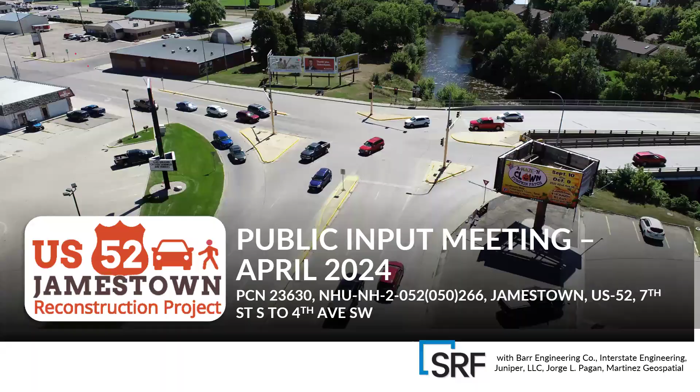During this presentation, I will discuss the project purpose and need, project location, project schedule, project background and feedback collected to date, traffic analysis and proposed alternatives, other project considerations, and preliminary cost estimate and next steps. The goal of the public input meeting is to solicit feedback from the public and answer any questions about the project. This is an important part of the design process and project success.

You can provide comments on the proposed improvements by Friday, May 3rd, by mail or email to the contact information that will be provided at the end of the presentation. All comments that will be submitted will be included in the environmental document.

The US 52 project limits start at 4th Avenue Southwest at the bottom of Mill Hill, crosses the James River, and goes through US 52 and 10th Street Southeast intersection to the north to 7th Street Southeast. US 52 will be a concrete reconstruction from 4th Avenue Southwest to the US 52 and 10th Street Southeast intersection, including replacement of the existing bridges over the James River.

Reconstruction will conclude where the proposed intersection improvements tie into US 52, 10th Street Southeast, and 1st Avenue South to the north and east. Pavement markings will be replaced on 1st Avenue South/US 52 between the intersection reconstruction and 7th Street Southeast to ensure connectivity to the 3-lane roadway section that runs to the north along US 52. Improvements to the pedestrian facilities and the addition of pedestrian crossings will also be included, along with the replacement of storm sewer, lighting, and signage.

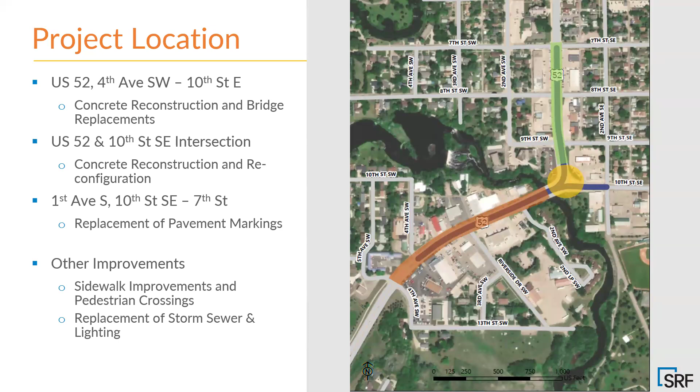The main objectives, purpose, and need of the project is to replace the deteriorating roadway pavement and bridges, maintain vehicular mobility and access to local streets and businesses, improve the pedestrian environment, facilities, and local connections, and improve this important connection to the surrounding transportation corridors, supporting local and regional mobility.

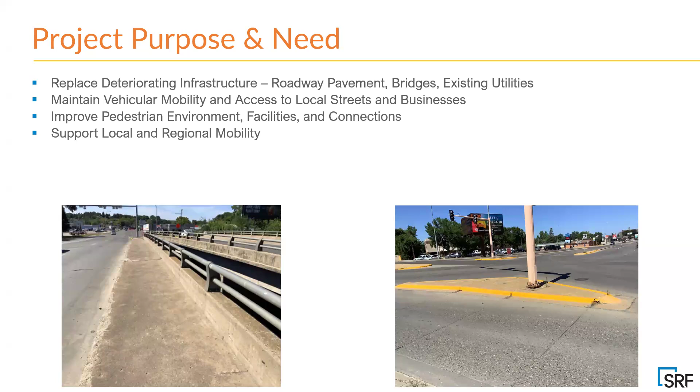The project schedule has several key milestones that need to be met before the project can be constructed. Several milestones and work have been completed up to this point. One of the first milestones is the field review, which is the first look at existing conditions in the project area. This was completed in January of 2023. An initial public input meeting was held in August of 2023, where local businesses and users of the corridor were invited to share their feedback on how they use the corridor and what improvements they would like to see.

Following that meeting, the project team analyzed existing and future traffic conditions and developed roadway alternatives and intersection options that satisfy the purpose and need of the project. Those design concepts are ready for public input, which brings us to where we are today with public input meeting number 2. This presentation and comment period allows the public to ask questions and provide feedback on the project alternatives.

Next is the environmental documentation process, which looks at environmental impacts for the proposed alternatives. During this phase, project decisions are made by agencies to move forward with final design and construction. The tentative completion dates include final design plans in May of 2026, with tentative construction in 2027. These dates depend on several factors and are subject to change.

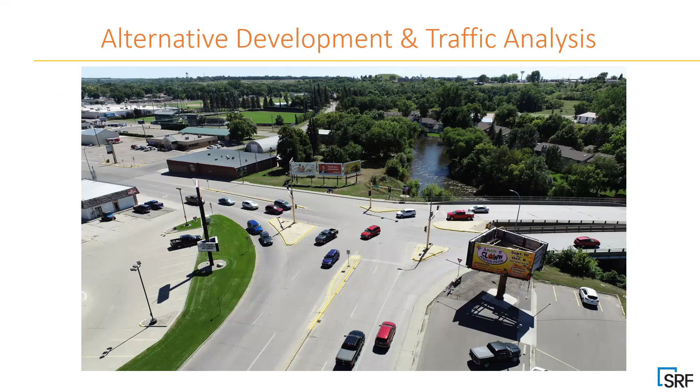Throughout the preliminary design process, we heard from stakeholders and the public that safer pedestrian crossings are a priority. The crossings are essential to provide connectivity and safe opportunities to access the adjacent park, residential areas, and local businesses. All the alternatives have 2 pedestrian crossings on US 52 between Mill Hill and the James River, which will be discussed in more detail in a few slides. In addition, all of the intersection options for US 52 and 10th Street Southeast will have crosswalks.

In addition to pedestrian needs, a component of this project was to look at existing roadway average daily traffic volumes, also known as ADTs, compare them to future needs, and determine the appropriate future roadway capacity. As you can see on this slide, the 2022 volumes range from around 13,000 to 21,000 vehicles per day. These volumes were increased by 1.1% annually to develop the year 2045 volumes, which aligns with the projected population and employment growth following a similar pattern.

The future ADT of 25,700 vehicles tells us that US 52 west of the river must continue to be a 4-lane roadway. One of the goals of the study is for First Avenue South to tie into the 3-lane design that is north of 10th Street Southeast intersection. This 3-lane transition to the north will happen through revised pavement markings and signing. The traffic analysis led to the development of intersection options and US 52 corridor alternatives.

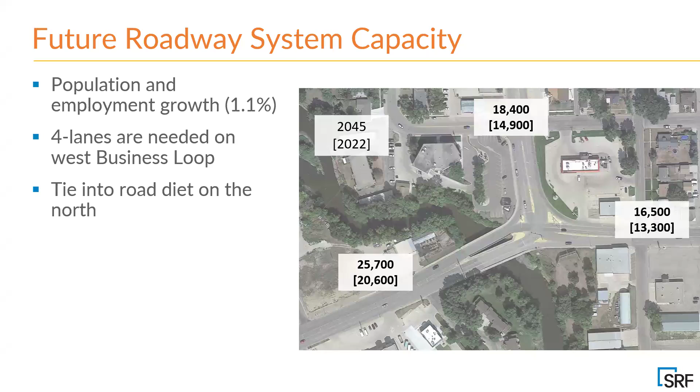When developing the design options and alternatives, the team focused on making sure we provided the desired improvements to satisfy the purpose and need of the project. This includes ADA compliant and improved pedestrian environment with the addition of 2 pedestrian crossings west of the James River, full intersection access at 4th Avenue Southwest, reduced driveway access and conflict points to improve safety, replacement of storm sewer and lighting, separation of the sidewalk from the roadway and parking lots, and replacement of the striping between 10th Street Southeast and US 52 intersection and 7th Street Southeast to connect to the existing 3-lane roadway to the north.

Certain design elements were also desired to be similar across the alternatives and options, including maintaining the 25-mile-per-hour speed limit, 12-foot lane widths for all through and turn lanes, greater than 5-foot sidewalks wherever possible, and boulevards to provide buffers between the roadway and pedestrians.

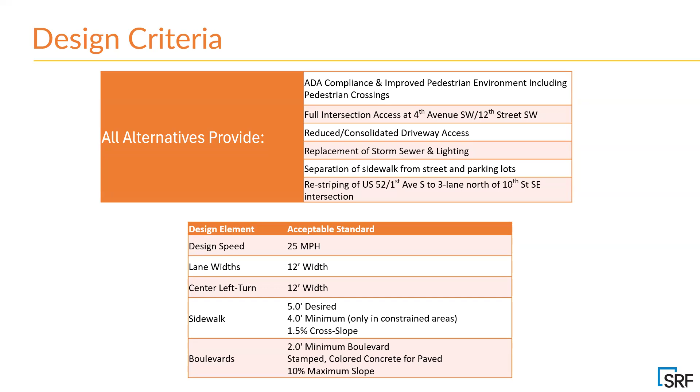As mentioned, 2 pedestrian crossings are anticipated to be incorporated west of the James River. These are a part of all project alternatives. The first one is on the west end of the project at 4th Avenue Southwest and 12th Street Southwest. This can be located on either the west or east side of the intersection. The second location is between Riverside Drive and 2nd Avenue Southwest. The concept currently shows this closer to 2nd Avenue Southwest, but can be moved further west.

Both locations should include pedestrian crossing signs on both sides of US 52 and in the median, and would be equipped with flashing beacons to ensure traffic is alerted to crossing pedestrians when present. Both locations will be finalized during final design as a result of feedback and coordination with stakeholders.

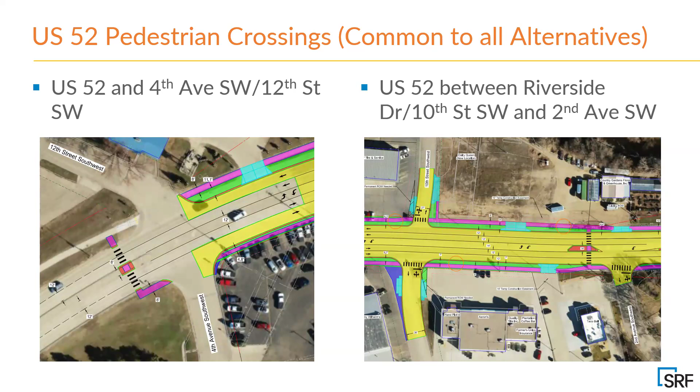Moving forward out of the analysis are 4 options at the US 52 and 10th Street Southeast intersection and 5 corridor alternatives for US 52 west of the James River. The 4 intersection options we will look at and ask for feedback on are option 1, radial T; option 2, double crossovers; option 3, displaced left turns; and option 4, a roundabout.

Corridor alternatives that are being evaluated are alternative A, no build, an alternative that is required to be included for all projects but does not address the needs of the corridor. Build alternatives include alternative B, 5-lane with 2-way left turn lane; alternative C, 4-lane full intersection access with raised medians; alternative D, 4-lane, 3/4 intersection access with raised medians; and alternative E, 4-lane, right-in, right-out intersection access with raised medians.

Starting with the US 52 and 10th Street Southeast intersection, option 1 is the most conventional of all of the options, with a 3-legged radial T configuration. The north and east legs both have 2 lanes to go west on US 52, with all other movements having 1 lane. This intersection has 1 traffic signal with pedestrian crossings and refuges on all 3 legs that are protected by the signal.

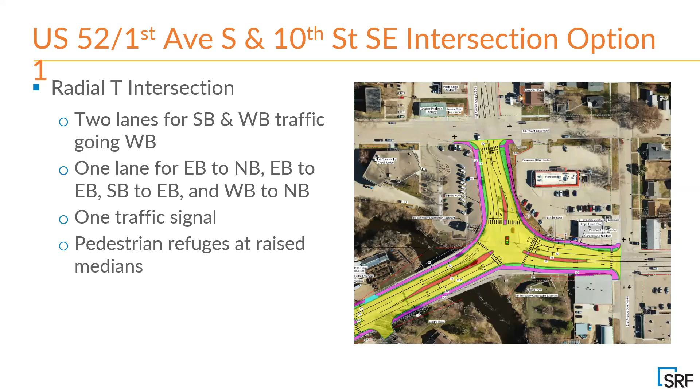Option 2 is the double crossover configuration. There are 3 signals, with the outer 2 located near 2nd Avenue Southwest and 2nd Avenue Southeast. At those outer signals, traffic wanting to make a left-hand turn at the intersection must cross over. Traffic making that movement from US 52 to stay on US 52 North, 1st Avenue South, would then make a left turn movement at the middle signal. Traffic from 10th Street Southeast going west on US 52 would do a second crossover movement at the west signal.

All right turn movements go straight through the outer signal locations. All 3 signalized intersections have pedestrian crossings and refuges and can be protected by the signal. 2nd Avenue Southeast becomes a right-in, right-out intersection for side street users with this option. The additional raised medians can be used for landscaping or aesthetics.

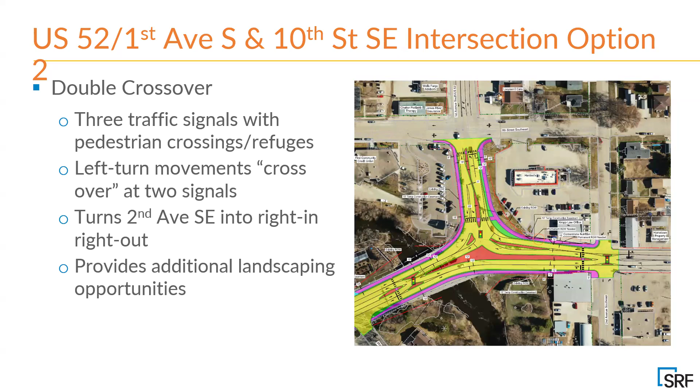Similar to option 2, option 3, or the displaced left turns option, contains the same double crossover at 2nd Avenue Southeast, with the same movements and reduction in access for side street users, but does not include a 3rd signal near 2nd Avenue Southwest. In this option, the westbound left turn movements from 10th Street Southeast are able to make their movements at the same time as the southbound left turn movements going east on 10th Street Southeast.

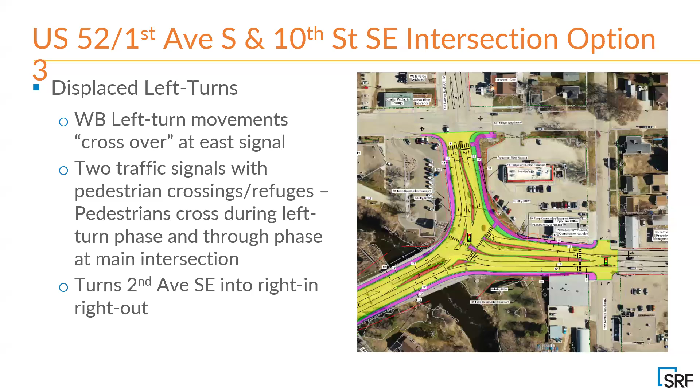This allows pedestrians to cross US 52 lanes into the center median at the main signal. When the US 52 movements that continue on US 52 North, 1st Avenue South, have the green movement, pedestrians are then able to move freely north and south on the east leg of the intersection.

Option 4, the last intersection option, is the roundabout. The roundabout would have 2 lanes entering and exiting on all 3 legs, with pedestrian crossings, refuges, and pedestrian crossing signs and flashing beacons to alert traffic. Right turn movements are able to move freely in the roundabout with dedicated lanes for those movements. The roundabout also allows the ability for users to make U-turn movements from all directions by entering the left-hand lane.

Depending on the finalized roundabout configuration, it is likely that acquisition of property in the northeast corner of the intersection will be required. Minimal to no impacts to parking will occur to the current businesses on this property.

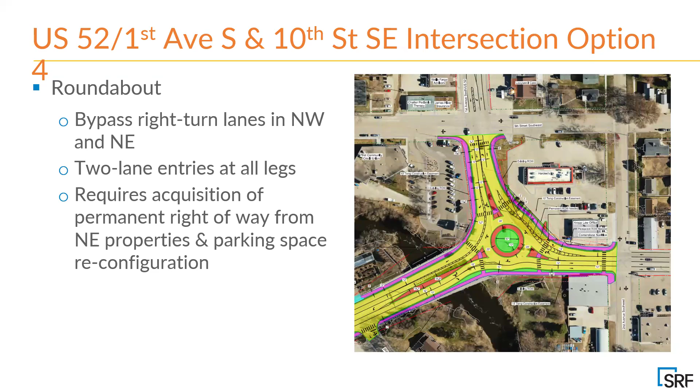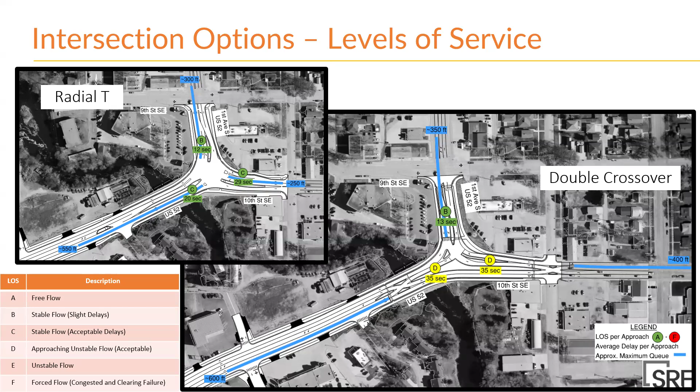Like previously mentioned, 4 intersection options are under consideration at the main intersection of 1st Avenue South and 10th Street Southeast. All of these designs offer acceptable levels of service, or the amount of delay and distance that vehicles queue up. The level of service for the radial T is either a B or C, depending on the approach leg. The double crossover option has longer delay and queues than the radial T, with up to level of service D on the west and east legs of the intersection.

The displaced left option also has levels of service B and C, but has the longest queues, especially on the southwest side of the intersection. The roundabout has the best operating levels of service. The queue lengths of the roundabout are also the shortest of all of the options evaluated, except for the east approach, which is only 50 feet longer than the others.

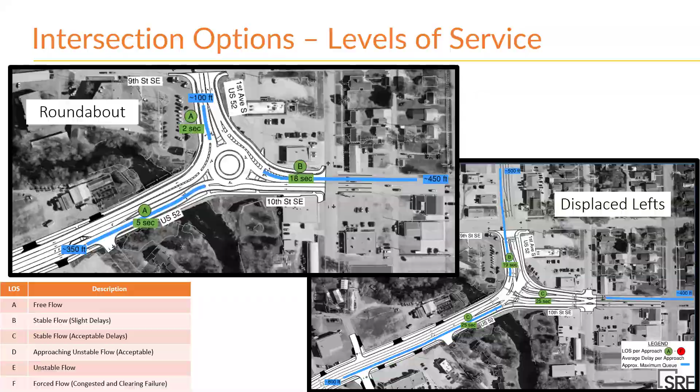Moving to the west side of the James River on US 52, we will start with alternative B, which is very similar to the existing configuration, with 5 lanes, which includes 2 lanes for each direction and a center 2-way left turn lane. This option maintains access to all movements to and from side streets, as well as most of the movements to and from private driveways. A safety improvement being proposed with this alternative is realigning the Riverside Drive approach with the 10th Street Southwest approach to eliminate the existing skew.

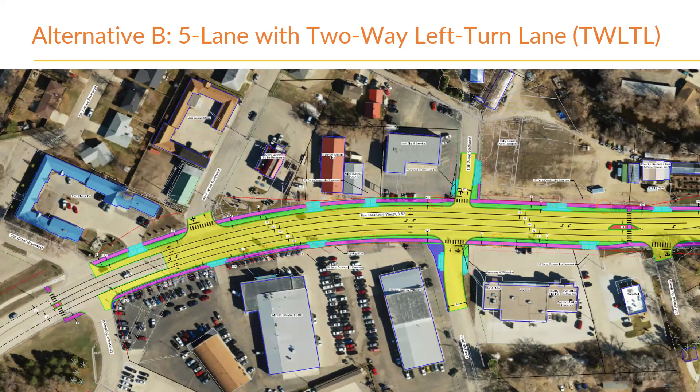On this slide, you can see a rendering of the 5-lane section for alternative B. This illustrates the skinnier outside lanes when compared to existing, which provides additional room for boulevard between the sidewalk and roadway and where lighting and trees can be placed. It also shows the space between the sidewalk and adjacent properties or parking lots.

Alternative C, the 4-lane full intersection access with raised medians, replaces most of the center two-way left turn lane with a raised median. This removes left turn movements for most private driveways and eliminates those conflict points along the corridor. The raised medians also provide additional opportunity for landscaping and aesthetics and can help create a calming effect along the corridor, reducing speeds of vehicular movement.

With the inclusion of dedicated left turn movements, all side street intersections with this alternative remain full access, meaning all movements in and out are allowed. Realignment of Riverside Drive and 10th Street Southwest is also proposed with this alternative.

This slide shows a rendering of the 4-lane section and raised center median for alternative C, as well as the next two alternatives. The outside of the roadway is similar to alternative B in the benefits with the boulevard and space between the adjacent properties, but these alternatives get rid of the middle lane and allow for an area of tree plantings or planter beds.

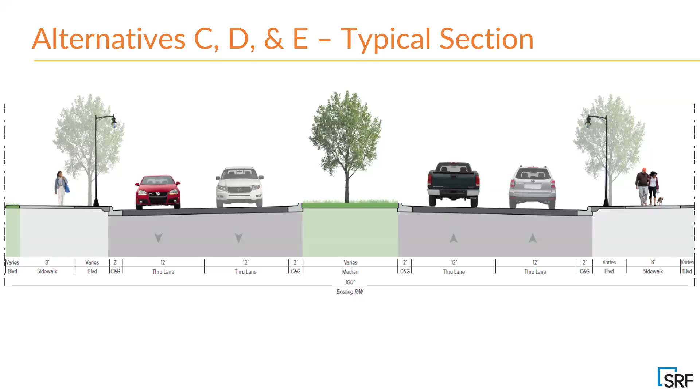Alternative D, the 4-lane, 3/4 intersection access with raised medians, further limits access and reduces conflict points by extending the raised medians further into the intersections of 4th Avenue Southwest and 2nd Avenue Southwest, and a raised median between Riverside Drive and 10th Street Southwest. This eliminates all left turn movements onto US 52, but still allows for left turn movements for US 52 traffic to enter side streets. Realignment of Riverside Drive and 10th Street Southwest is proposed with this alternative, similar to the previous alternatives.

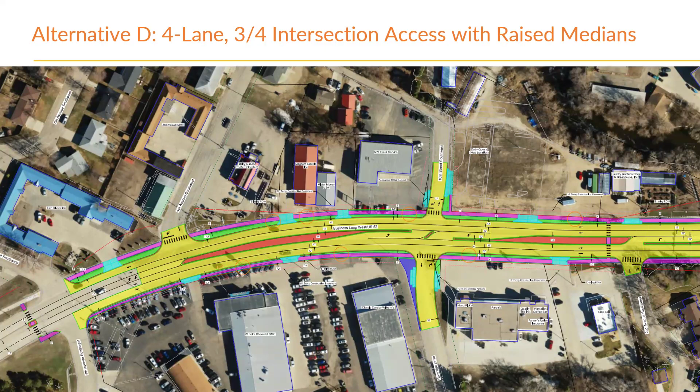With this alternative, intersection option 4, the roundabout, would be the only recommended option. That would allow vehicles traveling east to be able to make a U-turn at the roundabout and access businesses and side streets on the north side of US 52. Those on the north side of US 52 would have to utilize local roads to make their way to 4th Avenue Southwest and 12th Street Southwest to make a left and go eastbound on US 52.

Alternative E, a 4-lane right-in, right-out intersection access with raised medians, is the last corridor alternative and the most restrictive when it comes to access. A full raised median replaces all left turn movements for US 52, making all entrances and exits a right-in, right-out access, and results in this alternative having the least amount of conflict points.

Similar to alternative D, U-turn movements and local road reroutes are required for users wanting to go left on US 52. So option 4 is the only recommended intersection option for this alternative. Additionally, no realignment of Riverside Drive and 10th Street Southwest is needed due to the median blocking any movement from one side of US 52 to the other.

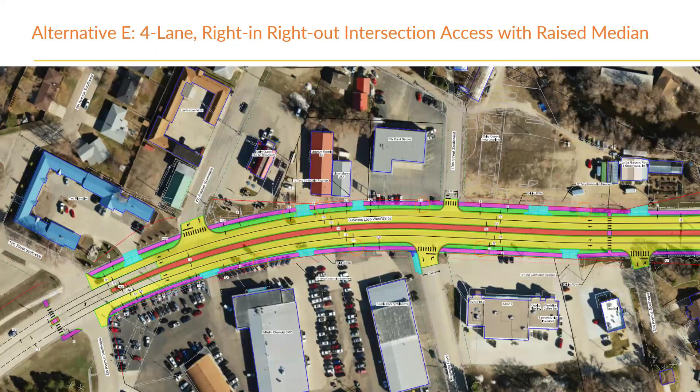The graphics shown here illustrate the movements that would be needed to be made, with left turn movements not being able to be made in alternatives D and E. The graphic on the left illustrates the local routes that could be taken in green that would get users to 12th Street Southwest and make a left turn onto US 52.

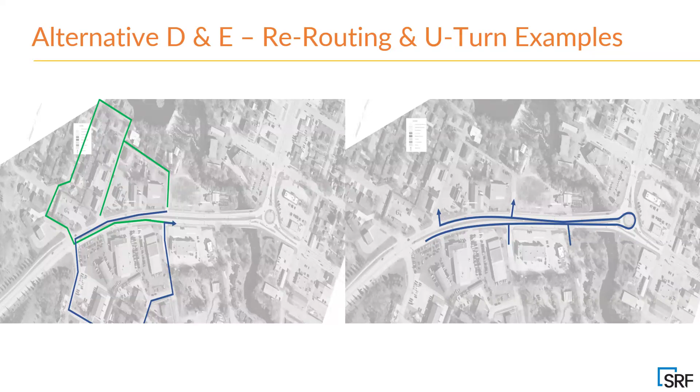The blue route illustrates the path taken for those on US 52 heading westbound that want to access the south businesses or Riverside Drive. The graphic on the right illustrates the U-turn movement being made at the roundabout intersection option for eastbound traffic and users entering US 52 from the south that want to access the north side of US 52 or head westbound. The existing 2 bridges over the James River will be replaced with 1 bridge.

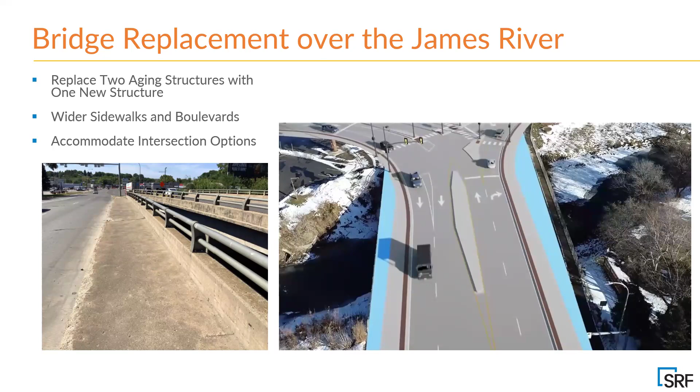The new bridge will overall have a narrower footprint than the existing bridges together. The new bridge will include 10-foot wide pedestrian/bike paths on both sides. The new bridge will look similar for all of the different intersection options.

Due to the state right-of-way available, most right-of-way impacts will be temporary easements to allow the contractor to work and construct the improvements near the right-of-way line. Partial permanent acquisitions will be needed to realign Riverside Drive and 10th Street Southwest, as well as in the northeast corner of the 10th Street Southeast intersection, depending on the option selected.

Within the project limits, there are 16 total private accesses. We will be coordinating with property owners to discuss how they and their customers utilize their property and determine if there is opportunity to close or consolidate an access that doesn't negatively impact their business. We have identified 7 potential locations for this, and we'll be discussing these locations with the property owners further.

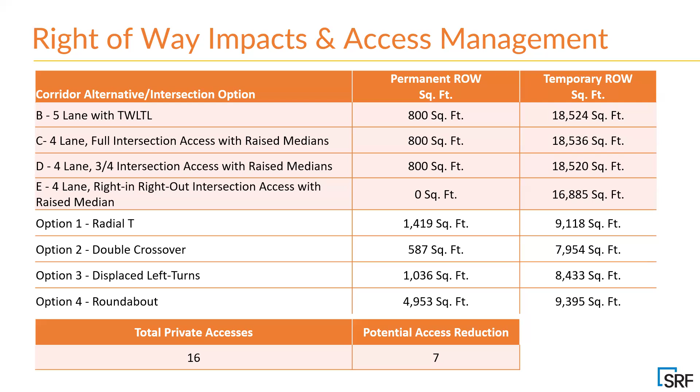As previously mentioned, the amount of right-of-way available and possible raised medians presents opportunities for landscaping and aesthetics. Some examples that may be explored are tree plantings in the boulevards and medians, planting beds where width requirements are allowed, and the delineation of sidewalk from adjacent parking lots, which can be done with raised curbs, painted boulevards, or decorative fencing.

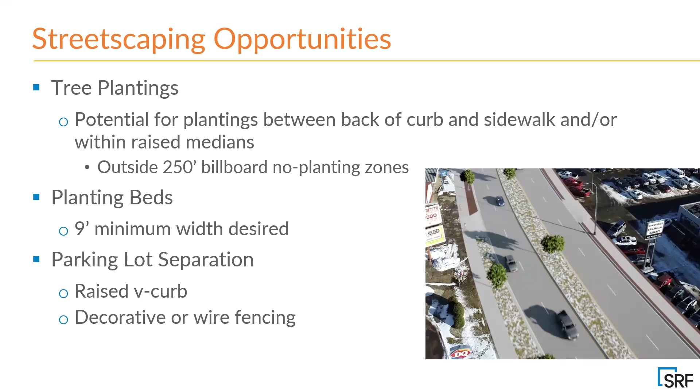Environmental considerations for this project will include limiting or eliminating impacts to the park property south of the US 52 and 10th Street Southeast intersection. No cultural resource or historic buildings are expected to be impacted with the project. The bridge construction will require looking at floodplain impacts, wetland impacts, and accommodations for animals traveling along the river's edge. Mitigation measures will be included in the plans in coordination with the applicable agencies to acquire permits, and approval will be part of finalizing the project.

Anticipated construction cost estimate ranges have been developed for the alternatives and options that have been presented here today. These are preliminary estimates and will be subject to change as the project development process continues. The corridor alternative cost estimates all range between $4.7 million and $7.8 million, with alternative B being slightly higher and alternative E being slightly lower than the rest. The replacement of the bridges over the James River will be between $3.6 and $5.8 million.